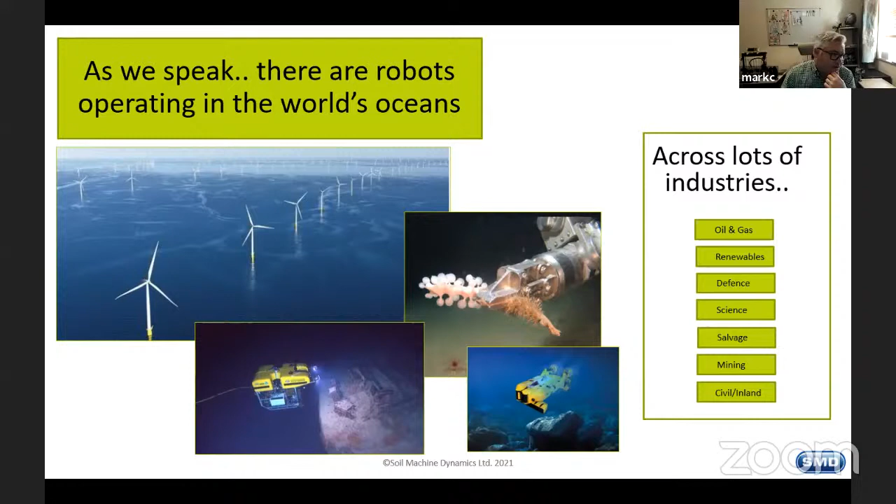So what types of robots are there? Well, you actually get really small to really big. The first type is called the light observation robot, ObsROV, as we call them. You can see here, this one fits into the palm of your hand. They go up to about maybe 50, 60 kilos, and they tend to be used for support roles or for inland work in dams or lakes or very near to the shore.

The next type of robot is this one over here. It's called an AUV - these are untethered flying robots. They tend to look very sleek, and when I say they fly, like an aeroplane under the water. They are programmed, and they can travel hundreds of miles. So when you hear about companies exploring underneath the ice in the Arctic or the Antarctic, it's these type of robots that are used, primarily to gather data and report back. When they come back, the data is downloaded, and the scientists can get a feel for what's actually happening.

The next robots, and this is the ones that SMD specialize in, are quite large, and they tend to be the working robots. So this here is what we call a work class robot. It is the work person of the sea, very widely used, and I'll talk a bit more about them shortly.

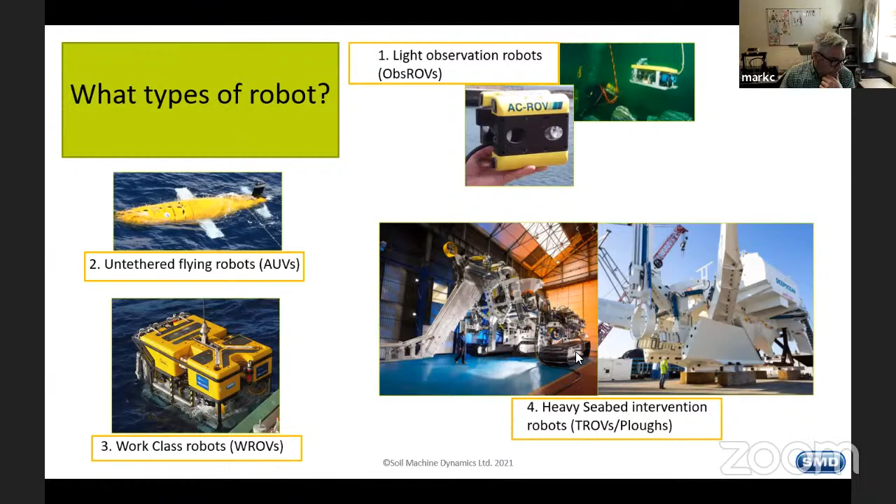So what do they do? The small robots, the observation ROVs as we call them, go down and have a look and survey. So they're used extensively for inspecting the hull of a ship.

When ships cross the seas, they often pick up marine growth, which needs to be cleaned off and inspected. Also, if there's any damage, they need to get down and inspect it. They can do it with divers, but if it's a busy port, they often don't want to use divers. So they'll use small robots that can be launched by hand, thrown over the side, to get an inspection of the hull of the vessel.

They're also used in dam inspection, and by police and fire services for inland waterways, for finding items discarded in a crime or whatnot.

When you start going much deeper, like looking at the Titanic, you start to use the bigger robots, and this is where the work robots come in. This robot here on the bottom left is one SMD supplied to MBARI, the Monterey Bay Aquarium Research Institute in California, used for very deep ocean observation and survey.

They go down and find new species, find new fish, take samples. You can see in the robot's hand, it's got a sampling tube, used for pushing into the sand and taking samples of the deep sea floor. This device underneath the robot is what we call a toy box, and it has lots of other tools that the robot can use when exploring.

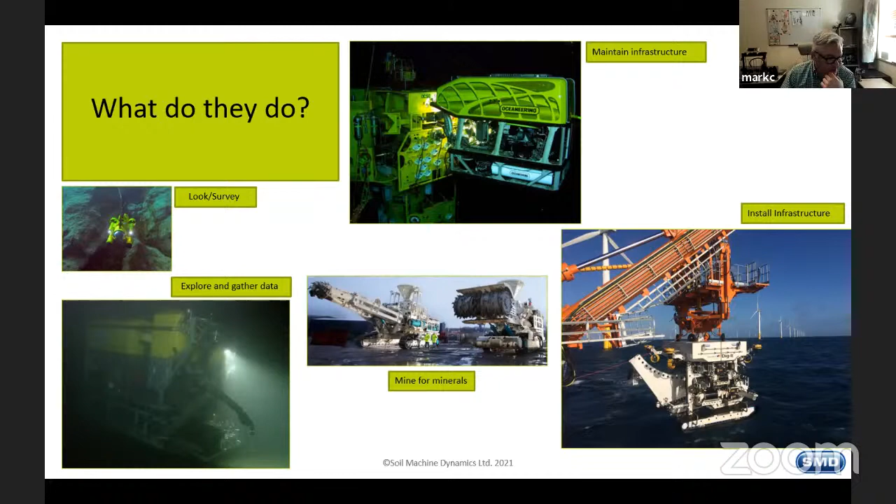So when we talk about subsea infrastructure, what do I mean? Some people don't realize there's lots and lots of technology across the world's ocean floor. On the left here is an oil platform, what we call an FPSO, usually connected to the seafloor with its legs. But underneath there is a whole city of technology that can control the flow of oil and gas, that can monitor it, that can do all sorts of things.

This technology can be maintained by divers, but as it gets deeper, you cannot use divers, so they tend to use robots. There are also safety implications with using divers, so people don't use them as much as they used to. You can see a little robot in this picture with its light shining, coming down to one of the subsea assets. On the right-hand side is a really interesting picture.

This is a picture of the subsea cables that crisscross the world's oceans. Some people may have heard in the news over the last year that the UK government was very concerned with Russia possibly disrupting the subsea cables into Europe, and this is what they meant by that. You can see between America and Europe, there are a huge number of cables that run, like the wiring in your house, from different points in Europe to America.

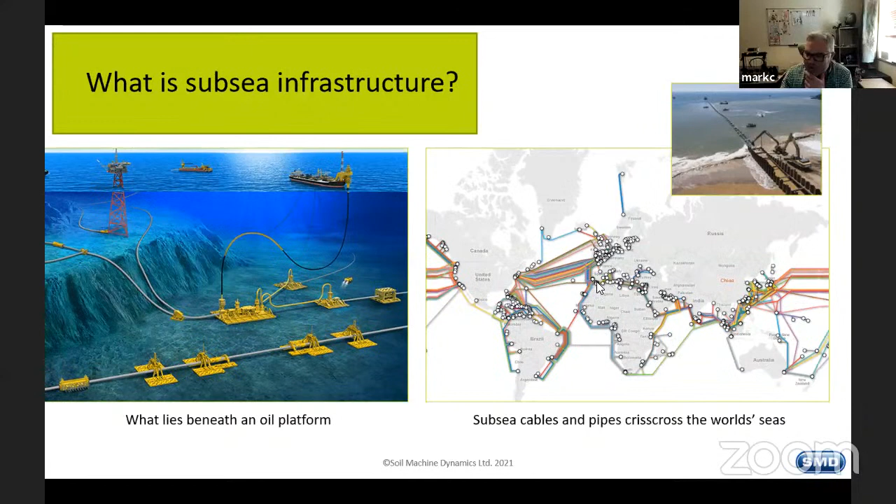So when we talk about a working robot, let's just look at the anatomy of one. This is one that SMD specialize in. It's about the size of an SUV, about 2 to 5 tons in size. Because it's the equivalent of somebody who comes around to your house to fix things, or a car mechanic, it has some similar features to what a human will have.

It has ears in the form of sonar systems. It has a head and eyes, in the form of pan-tilts, cameras and lights, and they move just like a human head. You can look at different things, you can tell the robot to look at things.

They have arms, which look like arms. Now these arms tend to be quite large and powerful. They differ quite significantly from car manufacturing robotic arms you'll see at Nissan. They tend to be stronger, a bit more robust, because these arms take a bit of a beating when the robot's under the sea. But a typical arm like that has about a 250 kilogram lift, so it'll be able to lift a motorbike up, no problem.

Pretty powerful arms. And the hands on the end of the arms are very dexterous, very flexible. They can hold a variety of tools, and they can be very gentle, or very powerful, and the operator has full control over that.

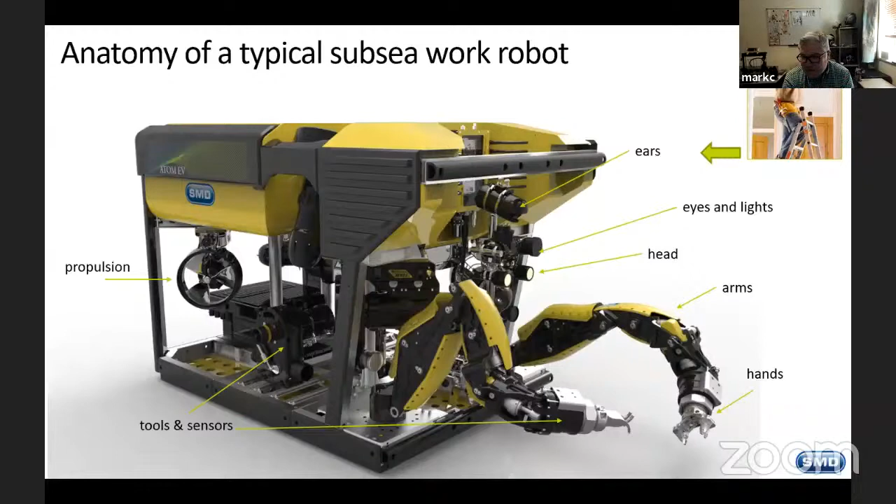So moving on to the challenges that a company like SMD, a manufacturer of these robots, sees going forward - a lot of people say to us, how do you make it waterproof? What about the pressure? You know, these are not really challenges now, we've overcome those with over 50 years of doing robots. That's not really the main challenge.

The main challenges come down to these 3 bubbles, really: it's cost around how we support and deploy these robots, the reliability of these robots, and how fast and how effectively they can do a task.

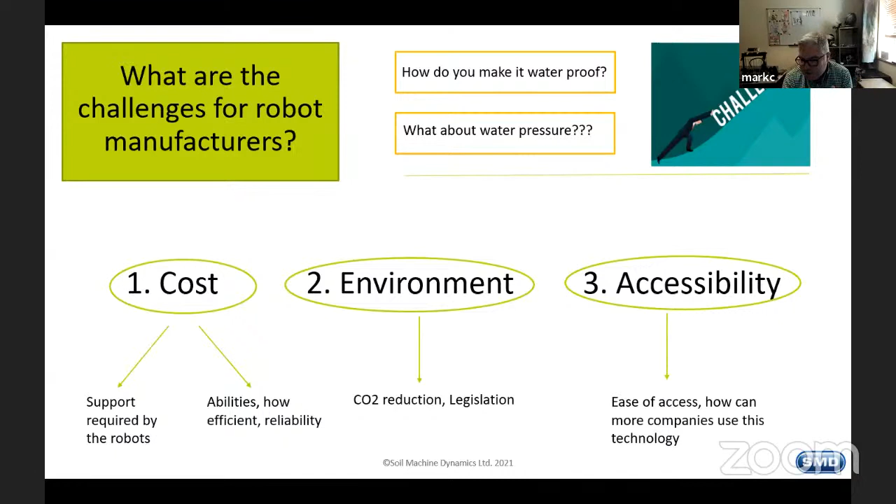So as an example, when we consider the cost, the environment, and accessibility, currently all these robots need a support vessel.

And you will have seen these coming into port, and if you've ever stood there watching these vessels, they're pretty big. This vessel down here on the left is an offshore construction vessel.

It has a garage - you can see the garage door here that opens. The robots are deployed off the side of it. And then on the back, here's a crane, which is used to possibly lower and install subsea equipment. Not always used - sometimes these vessels are just used to deploy the robot for inspection, repair, and maintenance work.

This is how they're often deployed off the side of the vessel using what we call an A-frame launch system. There are different variations, but this one's very common. You can see the man standing there watching the robot get lowered off the side.

And these can grow. When you start to look at the big trenching vehicles, these are massive pieces of equipment, and they need massive vessels. They're very, very large.

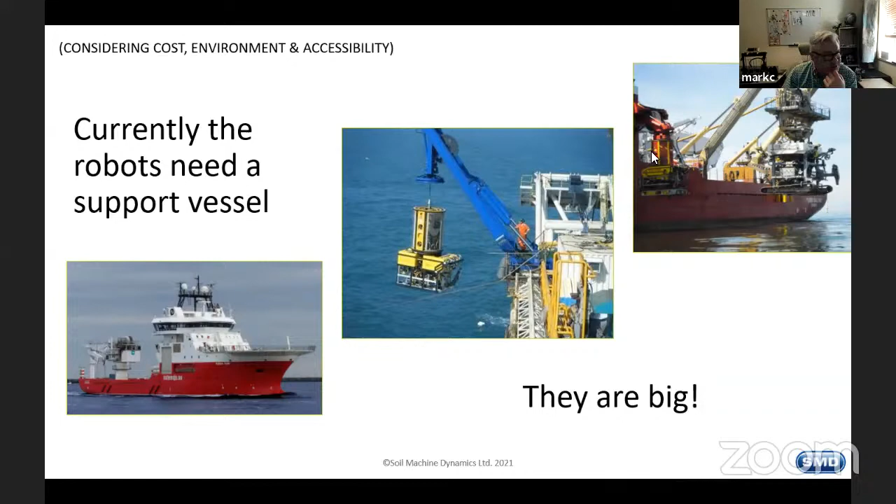So why do we need the support vessel? Well, actually, they provide a job of getting the equipment to site - they provide the logistics. The work can be anywhere - it could be a few hundred meters from shore, or it could be thousands of miles in the middle of the Pacific Ocean. So you need the vessels to get to site.

They're also used to house the experts, the guys who will run the robots, maintain the robots, and analyze the data. There are also laboratories on board, and lots of other things.

This picture up here on the top right shows a ROV control room, and there's quite a lot of people in this control room, all staring at the video screens that are transmitting the pictures back from the robot and what it is seeing. These screens also show sonar images, which are used extensively subsea, because quite often you can't see very far if the waters are murky. So you rely on advanced acoustics, which can give you a fantastic picture of what's happening.

And this guy here, he's actually controlling the robot with a joystick - he's flying it manually.

Once you've got to site, they provide the launch platform, which you saw on the previous slide, and there's another type there. And that means that the vessel itself can sit above the work site, holding station.

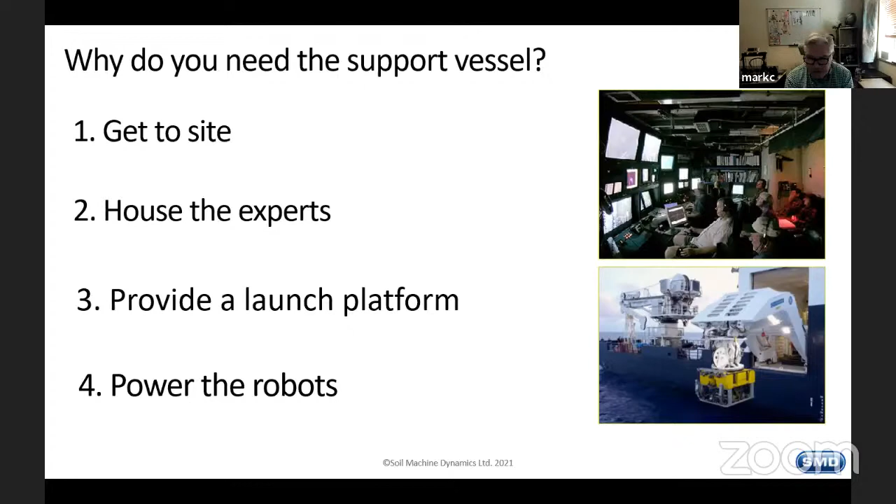Now, the smallest robots we make are about 100 kilowatts of power - still a reasonable amount of power, you don't get that in your house. Up to megawatts of power for the trenching machines - that's huge amounts of power, and power costs a lot of money as well.

So what's the problem? The vessels are large, not only to carry the equipment, but also the people and all the amenities that go with people. Now if you actually look at a vessel, half of it is for the equipment, the other half is for the people.

There are kitchens, there are beds, there are toilets, there's food, there's drinking water, there's gyms. They've got rec rooms - there's a rec room of a vessel down there. They've got pool tables. You've got to carry all this to sea with you, and that makes the vessels quite large.

Large vessels generate really high levels of CO2, and if you look into it, vessels are particularly dirty. They're also extremely expensive to run. £30,000 a day is the cheapest ROV vessel, and they can go up to £500,000 a day. Huge amounts of money. The other thing is it costs companies an awful lot to send a person to sea on an ROV vessel, and a figure I heard a few years ago was about £1 million per person per year.

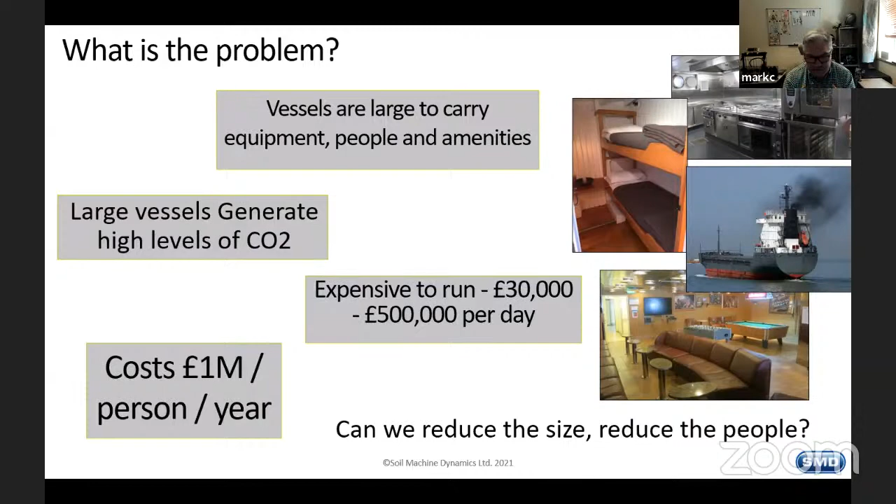That's when you start thinking helicopter transfers, insurance, offshore training, on top of food and all the other bits and pieces, and the wages these guys are paid. So the real question the industry is asking itself right now is: can we reduce the size of these vessels, and can we reduce the number of people actually there?

And we can. The solution that's now starting to emerge is uncrewed vessels — vessels that don't have any people on board. These are remotely controlled, highly efficient, and very, very small. Just by being small means you can drive efficiency and lower your costs. All they're designed to do is act as a launch platform for the robot. You don't need bathrooms, toilets, kitchens, or anything else. And it's particularly attractive for our industry

because everything happens under the water, so you don't actually need personnel on site. It's safer because you don't need people offshore. You can use smaller vessels, meet the legislation, reduce your CO2, and significantly lower your cost of operation. If you significantly lower your cost of operation, you can then open up accessibility to others who can enjoy the ocean or use it for exploration or energy or whatever.

There's a lot of talk now about being able to convert hydrogen to actually use it, convert that offshore, take it onshore, and use it to generate electricity that's going to power all our electric cars that we're all going to be buying in the next 5 to 10 years.

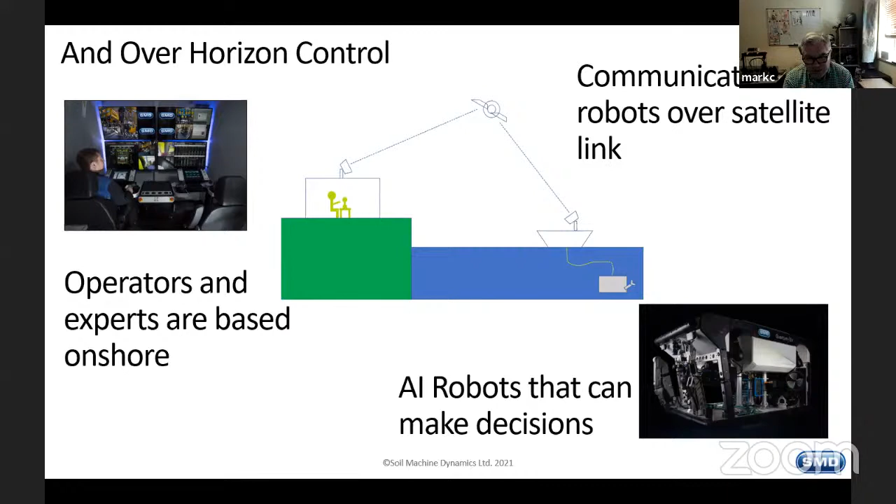This is, before I go to the next bit, a picture of quite an advanced robot, done by a company called Houston Mechatronics. They're based in America, and these guys are ex-NASA. They want to take it even a step further — they're wanting to not just use a robotic vessel, but to use no vessel at all.

This particular robot is a transformer. It folds up into a very streamlined torpedo-like shape and is launched from shore, transiting to site by itself — that could be 10 miles offshore or whatnot. When it gets to the work site, it opens up, its arms come out, its tools come out, and then it conducts the jobs. Its operators are based onshore. It's pretty new, pretty radical stuff.

The reason that's actually quite difficult to do is that you cannot get radio signals to transmit underwater. The US Navy and the British Army fly drones to Afghanistan — that's reasonably straightforward because they have very good communication links via the airwaves to that drone. When you move underwater, RF communications cannot penetrate the water. You have to rely on acoustics and possibly even lasers to communicate with the robots. That's really difficult to achieve.

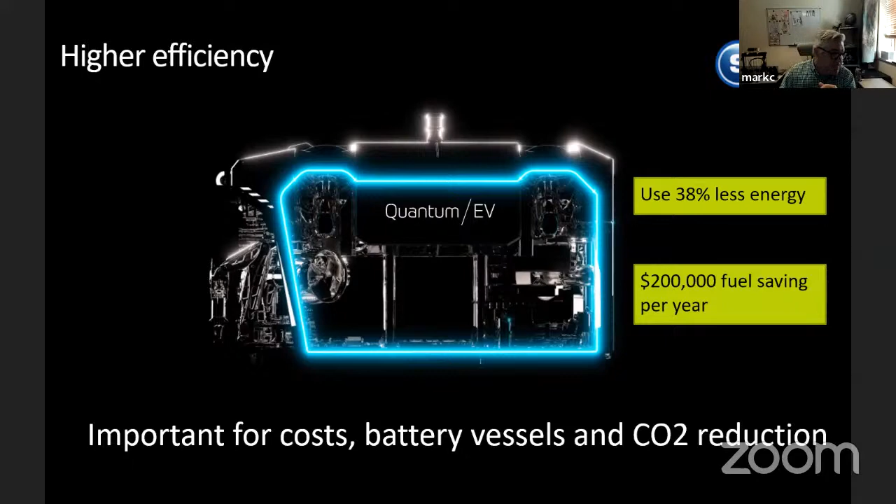You need the machines to be really dependable, really strong. It kind of goes without saying, but it's tricky to do because you don't want to be adding weight. You want to make sure it's still light, but it needs to be strong and able to withstand being bashed around. The machines that we make are tools, just like the digger you see in the street. You don't see shiny diggers, you see diggers covered in mud and bashed around a bit, because that's just what happens in real life. We need to make sure our machines can withstand that. So environmental testing, temperature testing, vibration testing, and really good solid mechanical engineering has to go into the design of the machines.

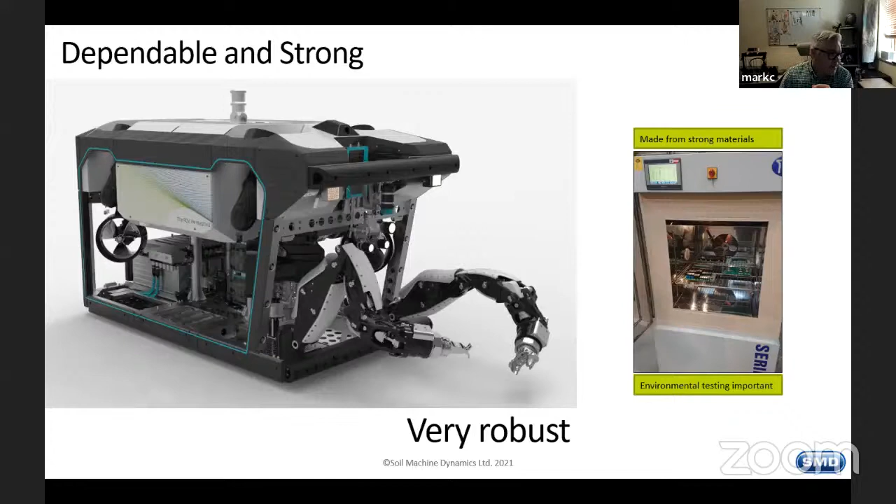Super reliability on the machines. Now, clearly, we do have to make them waterproof, and over time that can cause a problem. These machines tend to operate near the bottom. The infrastructure is on the seafloor, and quite often the seafloor is covered in sand. When you're working down there, sand can enter the water, and it's abrasive, and it can get into the propellers and the seals within the propellers and cause real problems. We need to counter that, and make sure we have ways in which the equipment will survive and keep going. This is an example of one of our new propulsion units, and it has features that will allow it to last for a long time in pretty arduous conditions. This is the test tank at SMD, where we've been testing this new technology, cycling it a hundred thousand times to check its reliability.

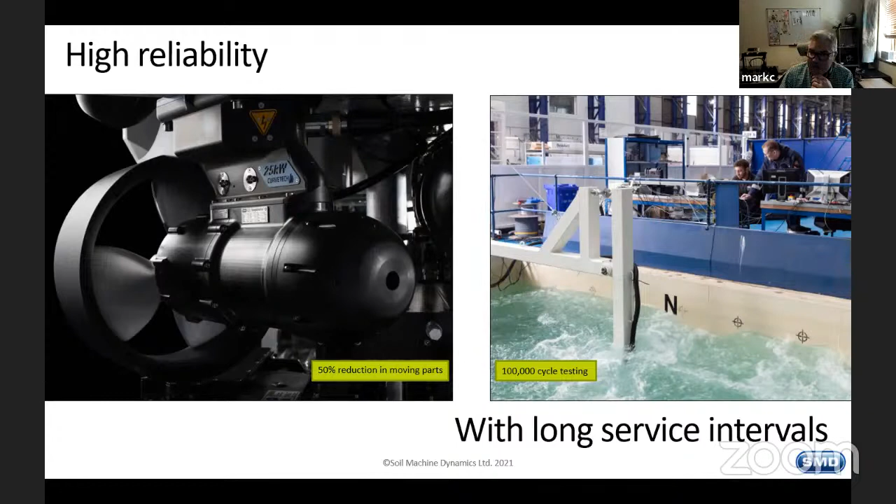And then finally, there's redundancy. This is a close-up of one of our newest vehicles, and you can see that same thruster unit here and over here, mounted in location. We also need to make the components scalable for different models, so we can have different sizes of robot, and we do that through a modular architecture. You can see the modular architecture at work here. These units across the back are modules—power modules, 50 kilowatts each—and they can be stacked up to give more or less power to the machine to suit the task the client wants it to do. But it also gives redundancy: if one of these modules fails, we can isolate it and carry on working on reduced power. It's absolutely key that the vehicle has redundancy, with modules that are self-contained throughout its construction.

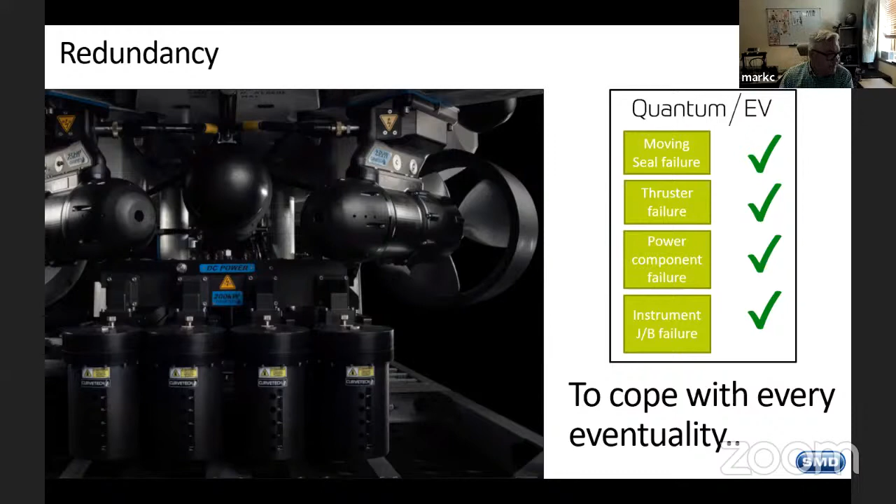So that's an example of what SMD does and how we're using innovation here in the Northeast. Thanks very much.

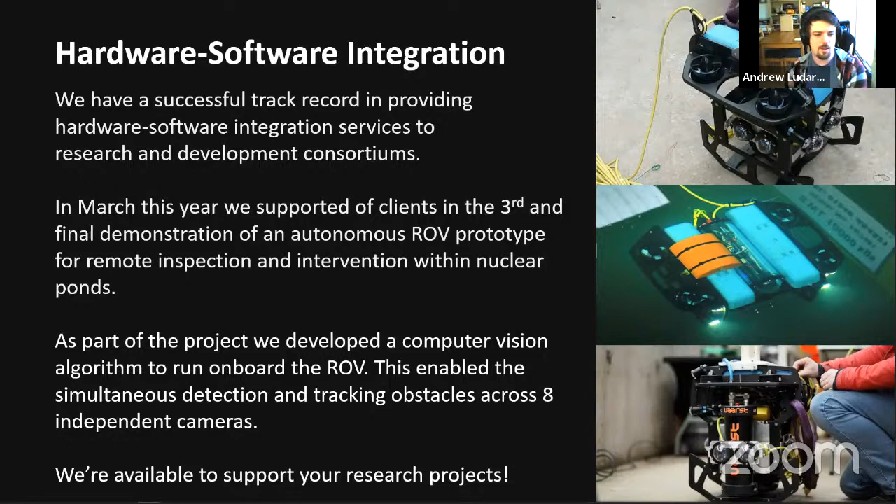So now I'm going to talk about a couple of things that we've not done yet, but we've started looking at. This is really just us putting a flag in the sand saying this is something we can do and this is something we want to do going forward.

So we can do near photorealistic simulation for computer vision. Why is this important? I think Mark touched on it well in his presentation: sending things offshore is really, really expensive. Even if you do it in the cheapest possible way, it's still expensive. Even if you test it in a pond, it's still really expensive.

What would be fantastic from an autonomy development point of view is if you can simulate as much as practically possible. There's definitely robotic simulation equipment and software out there, but they typically look terrible. The problem is that you can simulate movement and things, but what you can't typically simulate is your computer vision algorithms.

So what we're developing is using video game technology to allow photorealistic simulation. We can take the camera perspective from the video game and use that as a camera for the robot, so we can run the simulation. The key bit is simulating the environment such that optical effects, for example water and ambient light at the surface, pass through in a realistic way, so you get the same results from your simulation as from real world data. Needless to say, this is quite hard for a whole bunch of reasons.

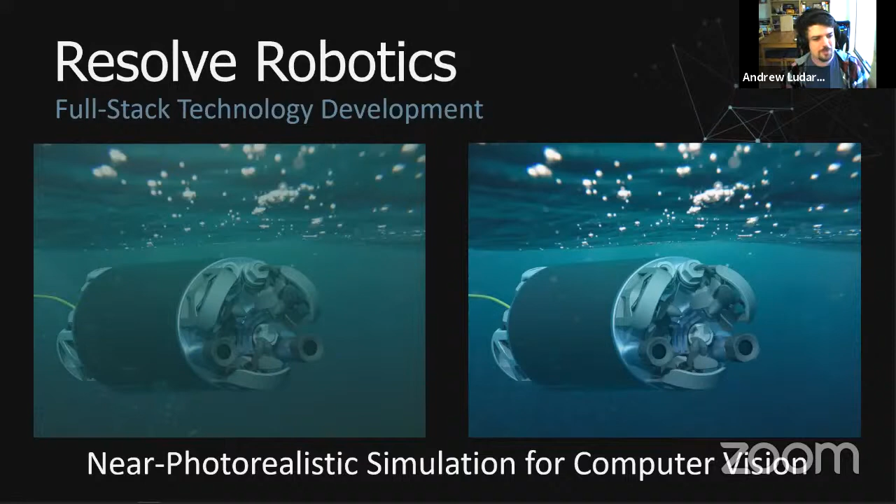A couple of other things we are intending to work on: I've mentioned previously our ultra small ROVs. We intend to continue working on these and develop a whole range of different products. We've got an Innovate UK project at the moment looking at modular manufacturing, focusing on how we manufacture a wide range of different products all at the same time, and we're planning to tie that in with our small ROVs as well as the rest of our products.

Next, we've got an integrated low-cost SLAM and autopilot system. We want to develop a sensor package which can detect the environment and also allow for some autonomous functionality. We want to take what would be the tether from the ROV, plug it into our SLAM package, and that SLAM package can then pilot the ROV in place of a manual operator. For the nuclear industry, we have a wireless solution, which won't translate offshore particularly well, but for the nuclear industry this lets them remove the tether into the pond completely.

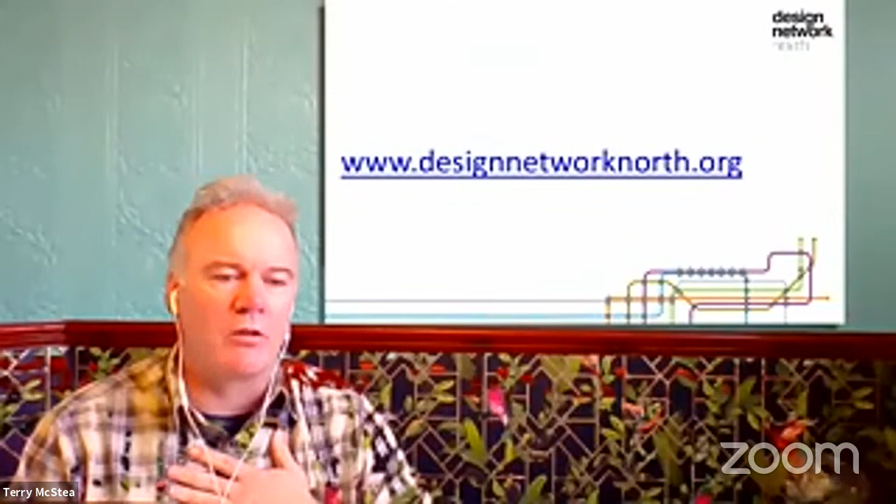This event has been sponsored by the Supply Chain Northeast program delivered by RTC. There's a team of specialists, and it's not just about supply chains. It's about growing your business, getting into new markets, doing new things, diversifying. There's a team there who can give you a lot of help and support with all of those things, helping you identify new opportunities. We've got issues around standards, skills. I'll send information on that out to you on Monday, and please do get in touch with them if you think that might be useful.

They've got a couple of events coming up. There's one on objectives and key results for your business, on the 26th, which is the week after next. Just a couple of hours there, again, online. We've got one later that week, reimagining through performance, productivity and digital transformation, so kind of working in a more digital way. And then there's a session on cybersecurity, understanding what cybersecurity is and what you do about it and how to manage the risks. I think it's probably relevant to all of us.